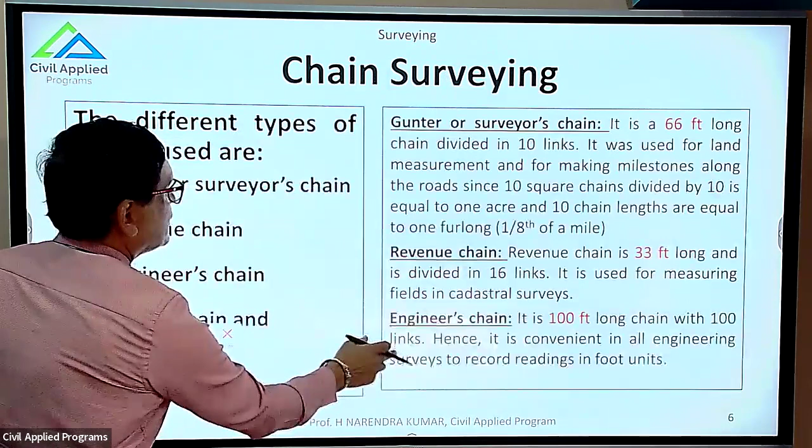I think I left my discussion on the different types of chains used in chain surveying. Let me go to that slide. This is where I left my class. Once again, for continuity, let me go through this slide. So this is the different types of chains essential in chain surveying: Gunter's or surveyor's chain, revenue chain, engineer's chain, metric chain, and steel band.

As I said earlier, the steel band is one of the ultimate linear measuring instruments used for precise measurement. You know that baseline is one of the most important lines in chain surveying, so we can make use of the steel band, also called band chain, for precise measurement. It is also available in lengths of 20 meter and 30 meter. So this is where I left in the previous class.

This is the process employed in chain surveying. What exactly do we do in chain surveying? Before getting into chain surveying, first we need to understand the terminology, that is ranging. What is ranging, my dear students? Ranging is nothing but the process of locating intermediate points on a survey line.

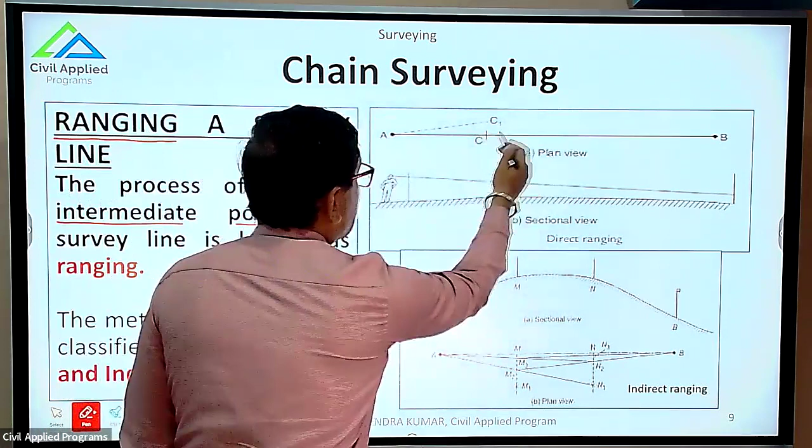You know the chain is made up of 20 or 30 meter. Whenever the line is more than the chain length, we need to mark intermediate station points in order to measure the line in a straight line. So that process of locating intermediate points on the survey line - why do we need intermediate points? Because in order to measure the length AB, we need to mark C, D, etc. on the chain line. So this process is called ranging a survey line.

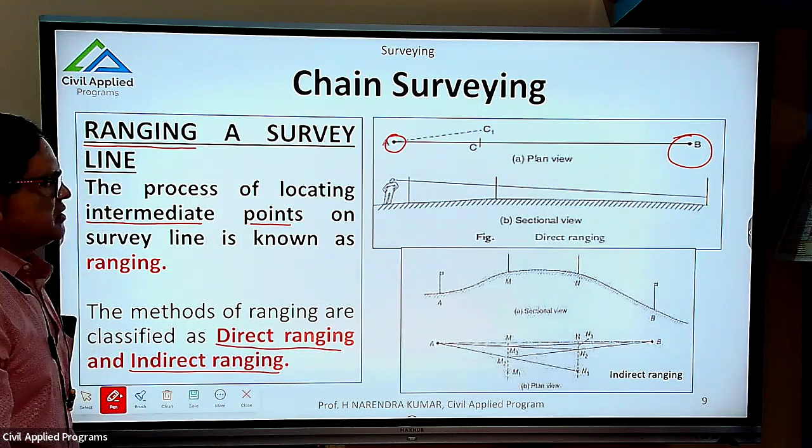So the methods of ranging are classified as direct ranging and indirect ranging. Once again, direct ranging and indirect ranging. The name itself gives you an idea. Direct ranging is when the extreme points A and B are visible, intervisible. So when there is intervisibility, we can go for direct ranging. For direct ranging, we don't require any instrument, we can make use of our eye, called eye ranging.

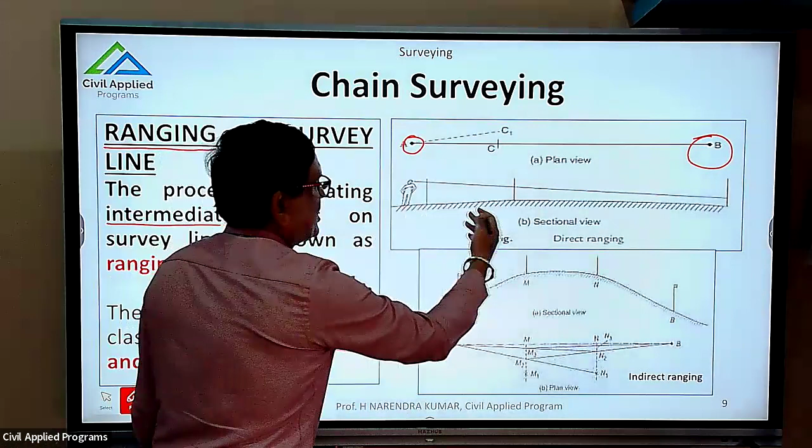By keeping ranging rods at A and B stations, we can place another ranging rod at a suitable distance less than the chain length, so that we get a straight line. So all three ranging rods are coinciding. This is called direct ranging.

Then what is indirect ranging? For example, there is A point here, there is B point. There is a small mound, not a hillock - please remember, it is not a hillock like Nandi Hills, it's only a mound - so that you can cross over from A to B, but there is no intervisibility. If you stand at A point, B is not visible. When you stand at B point, obviously A is not visible. So what we are going to do is indirect ranging.

What is indirect ranging? Randomly we select the stations M1 and N1. The person standing at A will call M1 to a point M2 such that A, M2, N1 is in a straight line. So first we need to select random points away from the chain line, because we don't know those 2 points are on the chain line, since there is no intervisibility. So I'm going to select random points M1 and N1.

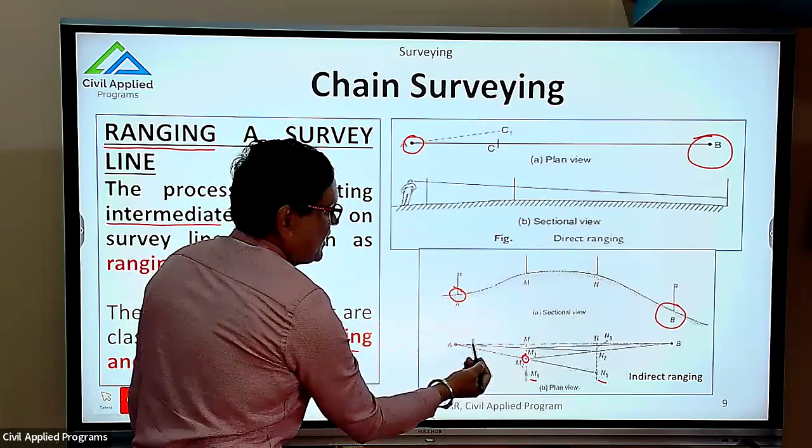Then a person standing at A will call the M1 person to move towards the chain line such that he occupies a station point M2, so that A, M2, N1 is in a straight line. Then the B person will take over. He will call the N1 person to move towards the chain line, occupy a position N2, such that B, N2, M2 is a straight line. This process is repeated several times. Finally, they arrive at stations M and N such that AMN is a straight line.

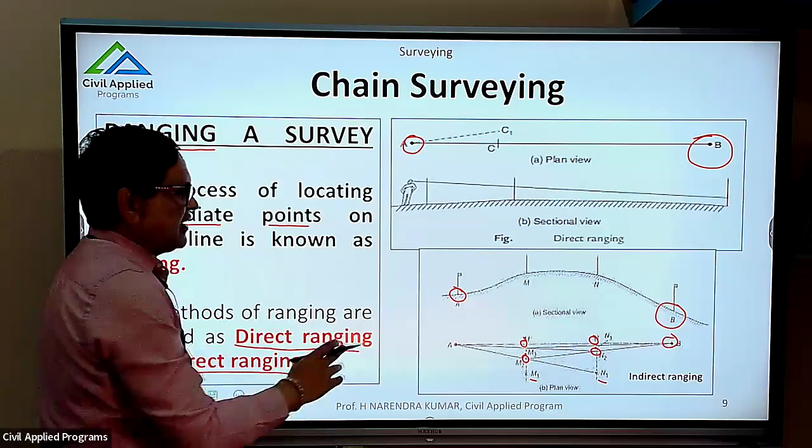Similarly, BNM is a straight line. So at that particular stage, we can say M and N are there on chain line AB. This is a very, very slow process.

Since A and B are not intervisible, we need to go for indirect ranging. This is also called reciprocal ranging. Why is it called reciprocal ranging?

Because the people standing at M and N reciprocate to the instructions given by the people standing at A and B. They reciprocate simultaneously to move towards stations M and N. So this is a very slow process, but a wonderful one in order to mark the intermediate points on the chain line when the stations are not intervisible.

When they are intervisible, the process is very simple. We'll go for direct ranging.

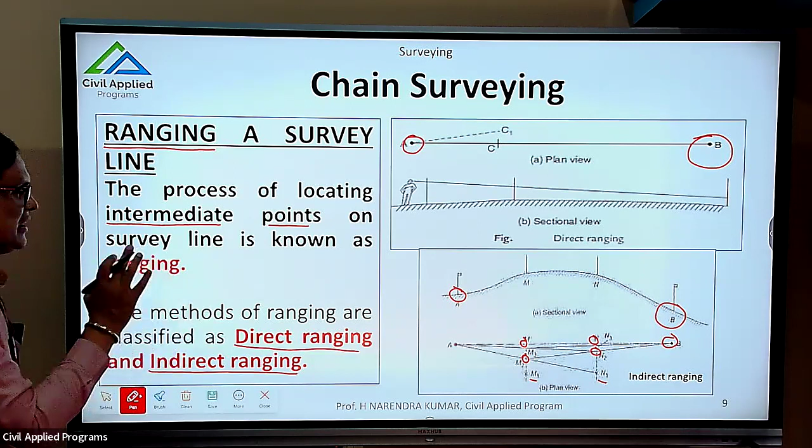So when is chain survey suitable? Let me detail it point wise. Whenever the area to be surveyed is comparatively small, you need to remember this. For example, if somebody asks me to do chain surveying for the entire Bangalore city, it's not possible. Well, it's possible, but it will take years together. So whenever the area is very small, we can go for chain surveying.

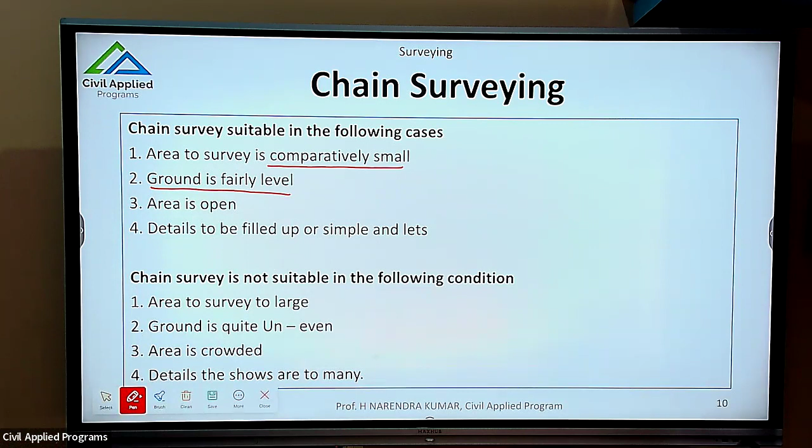The second point is that the ground is fairly level. Then chain surveying is easy. Otherwise, as we discussed about ranging, we need to go for reciprocal or indirect ranging, which is a cumbersome, complicated, time-consuming process. So if the ground is fairly level, there's no problem with intervisibility, and I can go for chain surveying.

The area should also be open. This is also important. If the area is bushy, having a lot of trees, it is going to hamper our surveying. Then, details to be filled up should be simple and easy. If the details I need to capture, like buildings or other natural resources, are simple and fewer in number, then I can go for chain surveying.

What about not suitable conditions? If the area to be surveyed is large, as I said earlier, it becomes a very complex process. If the ground is quite uneven, then whatever I said for suitable conditions, the reverse applies, making it not suitable.

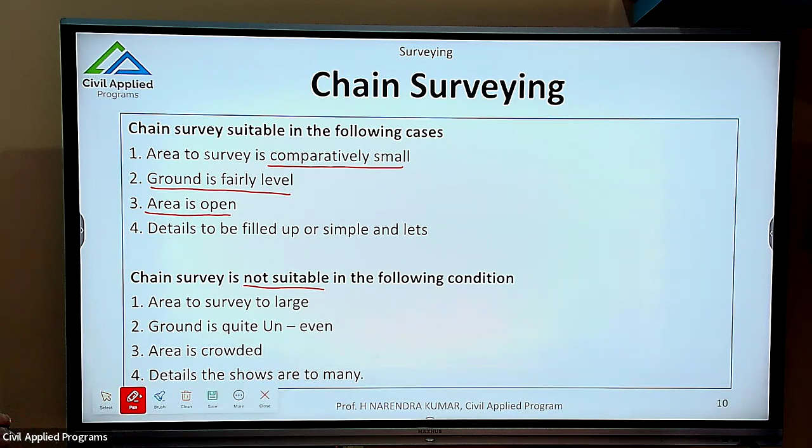If the area is crowded, with a lot of features, it's difficult for me to gather the information, so it becomes very difficult to go for chain surveying. Also, if too many details are available, that is very difficult for me to capture.

Let us understand the various terminologies that are essential in chain surveying. I already mentioned things like station. So what exactly is the meaning of all these terminologies used in chain surveying? This is essential in order to understand chain surveying. For that, I've taken up this particular diagram, which gives complete information about chain surveying.

First terminology: Station. What is a station in chain surveying? A station is a point of importance at the beginning and at the end of a survey. So that means the minimum number of stations required is 2, one at the beginning of the survey and the other at the end.

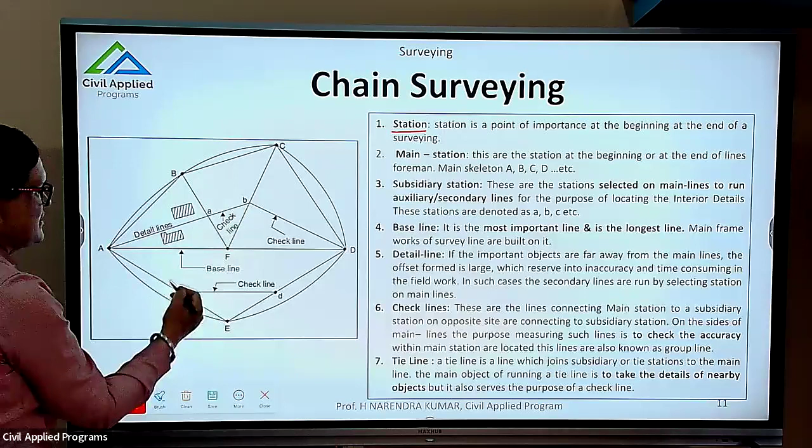If you look at this diagram, you can see a lot of stations: A, B, C, D, E, and also small a, b, c, d, and similarly F. So all these are stations, and among them there are different types.

The first one is the main station. What is a main station? These are the stations at the beginning or at the end of lines. So the main skeletal stations A, B, C, D, E, F are nothing but main stations.

Then what are subsidiary, or secondary, or auxiliary stations? Different names are used for these. Subsidiary stations are stations selected on the main lines to run auxiliary or secondary lines, for the purpose of locating interior details. For example, look at the diagram: there is a building here, so I need to get the details of this building. To do that, I'm going to run secondary lines.

You can see a lot of secondary lines here. All these secondary lines are marked with subsidiary stations, shown here as A, B, C, D. These are all called subsidiary stations.

Next, one of the most important terminologies: baseline. The most important and longest line in the network of our survey is called the baseline. You can see here, AD is the baseline, the longest line. This baseline will be selected on a flat, plane surface preferably.

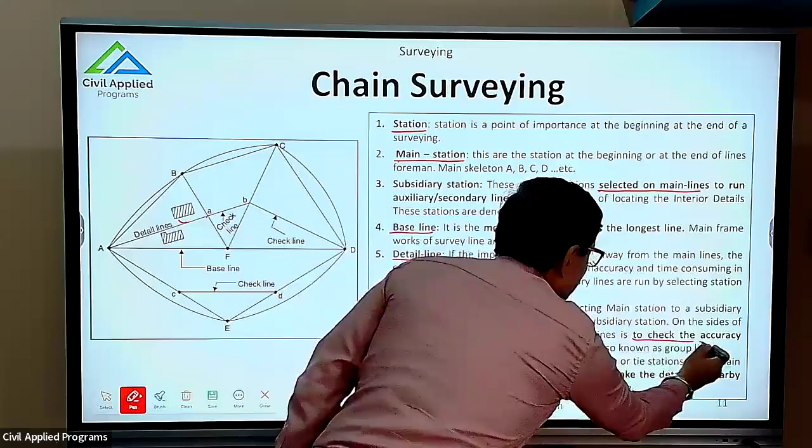Next important terminology is check lines. What is the main purpose of check lines? To check the accuracy within the main stations.

These are lines connecting a main station to a subsidiary station. Subsidiary stations are connected using check lines, and the purpose of measuring such lines located on the sides of main lines is to check the accuracy within the main stations. These lines are also known as group lines, since they are grouped together to check the accuracy of the survey work.

As civil engineers, whatever we do, even marking the plan of a simple residential building, we need to check our marking using check lines. These check lines, on the ground as well as on the plan, should have the same length. So check lines give us complete information about the accuracy of our framework.

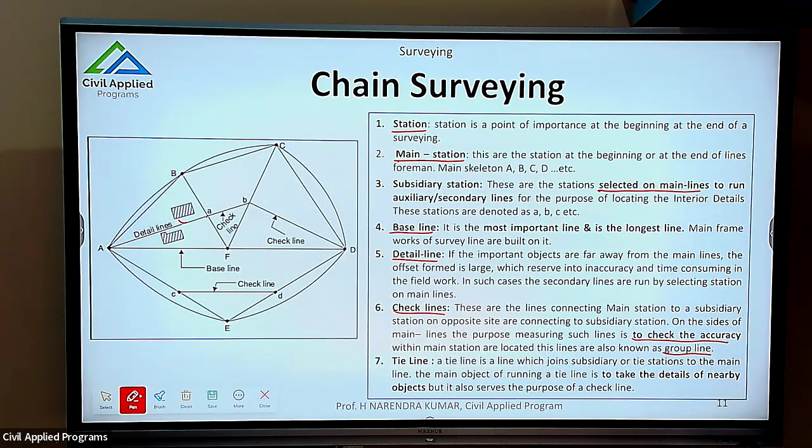Next one is the tie line. The name itself gives an idea—tying together different subsidiary stations. The tie line is a line which joins subsidiary and tie stations to the main line. The main object of running a tie line is to take the details of nearby objects.

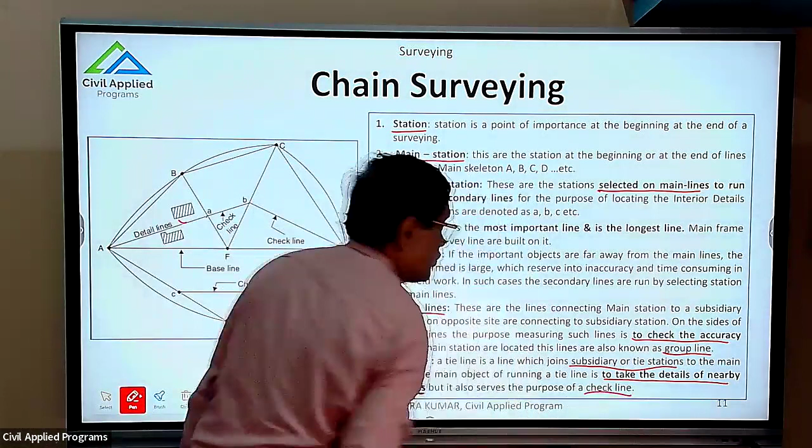Sometimes the tie line also serves the purpose of a check line, and the vice versa is also true—a check line can be used as a tie line, and a tie line can be used as a check line. These are all the important terminologies in our chain survey.

Okay, so what are the points to be considered in selection of station? Okay, this you need to remember. What are the points to be considered in the selection of a station? So there are several points. Let me go through one by one.

First and foremost requirement while selecting a station is the station selected should be visible from at least two more stations. Okay, so see, you need to actually connect this particular sentence with the principle of surveying.

What is the second principle of surveying, my dear students? The second principle is nothing but, in order to mark a new station, there must be two measurements. Minimum two measurements should be considered in order to mark a new station. This is our second principle. So, if a station is visible from at least two more stations, then only the second principle holds good. Otherwise, second principle will not hold good.

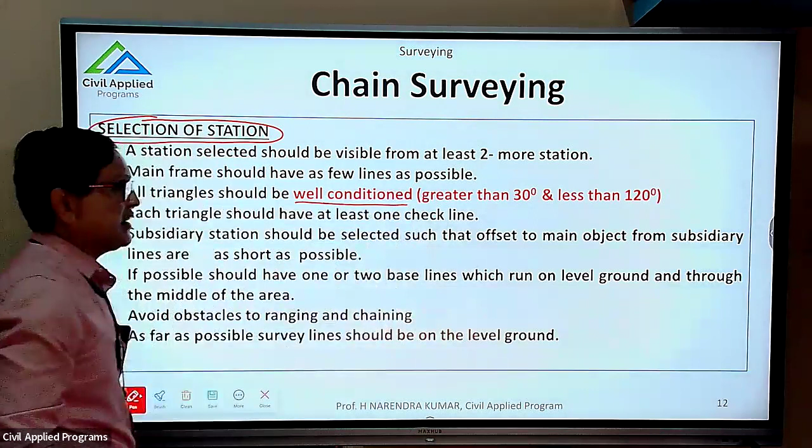The third point is very, very important, that is why it is written in red color. Please do remember, all triangles should be well conditioned. What is a well conditioned triangle? This you are going to study in mathematics. This is a typical triangle used in our survey work.

Well conditioned triangle is that triangle in which the angles are greater than 30, less than 120 degrees. I checked the last 8 years' question papers, and this appeared in almost all of them. You got it? The importance of this particular terminology, well conditioned triangle, under the selection of station, is a point to be considered.

That is, all the triangles that are created in a framework of surveying - forget about chain surveying - in any type of surveying, the triangles must be well conditioned triangles, greater than 30 degrees and less than 120 degrees. If you are interested, why actually 30 degrees and 120 degrees?

If you look at the sine series and cosine series, sine 0 is 0, sine 30 is 0.5. From sine 30 to sine 90, the next 0.5 is rising. So if you commit a mistake in the first 30 degrees in angular measurement, then in the calculation of linear values, it actually multiplies. That is why always the angles must be greater than 30 degrees and obviously less than 120 degrees.

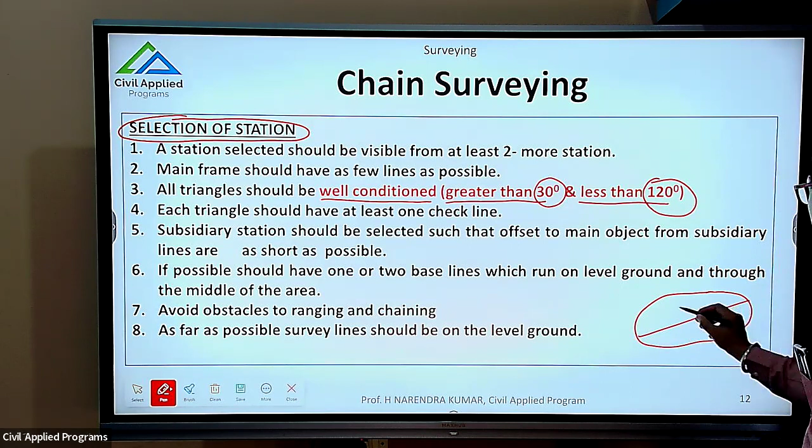Usually they say consider two baselines instead of one single baseline. For example, let me draw a simple sketch here. If this is the area that is considered, the selection says at least you should have two baselines crossing over.

If possible, this is not mandatory, not an essential requirement. The essential requirement is that at least you should have two baselines which run on level ground and through the middle of the area. Both baselines are crossing over in the middle of the area, and they are the longest lines.

Avoid obstacles to ranging and chaining, because if obstacles are there, it creates a lot of problems to cross over. That itself is another topic I would like to discuss in detail. Obstacles may be for ranging, obstacles may be for chaining, or obstacles may be for both ranging and chaining. These are the three classes of obstacles.

For example, there is a mound - we did reciprocal ranging for that, right? That is also one type of obstacle. If it is a hillock, then I cannot go for reciprocal ranging. Then what am I going to do? I'm going to consider what is called the random line method.

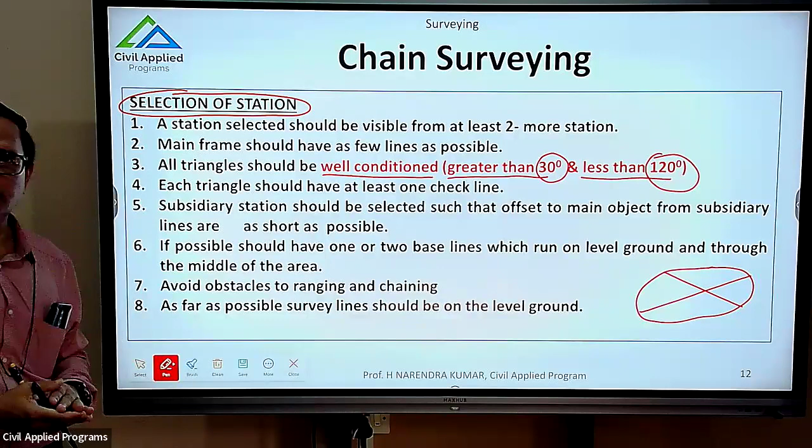This random line method is nothing but taking a random line away from the obstacle in order to cross over. And there may be a pond, a water body, a river, a building - these are all the different classes of obstacle, my dear students.

Next one: as far as possible, survey line should be on level ground. Why should it be on level ground? Because if there is a mound, then we need to go for reciprocal ranging, since there will be an intervisibility problem.

Then we discussed about offset in the previous slide. So how to erect offsets in the field? There are different methods of erecting the offset. This makes use of simple geometrical construction that we discussed in high school - dropping a perpendicular, erecting a perpendicular. These are all terminologies we already learned in high school, and the same geometrical construction is used in our survey work.

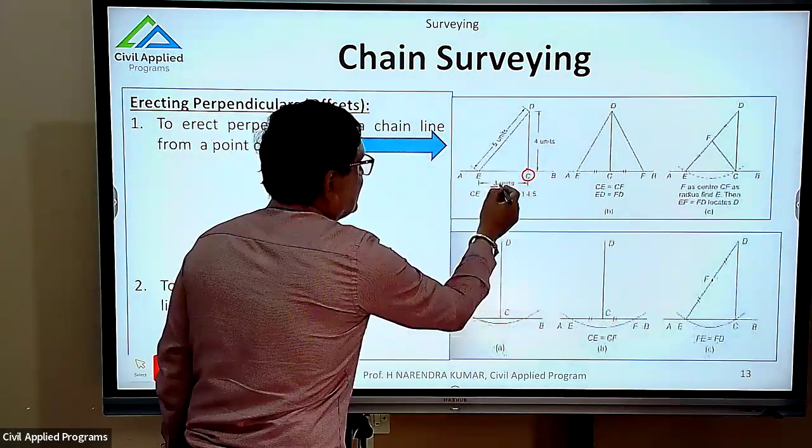Everybody knows this is a right angle because 3 square plus 4 square is equal to 5 square, right? We learned this even in high school. Using this, we can easily erect a perpendicular using the 3, 4, 5 method.

Simple way. Next one is we can erect a perpendicular from C by taking equal distances: CE is equal to CF - you take CE distance and CF distance as equal. Then ED is equal to FD. So this is another way of erecting a perpendicular. Please remember we are erecting a perpendicular.

Next one is another complex process. C is the point. You take one random point F, and with FC as radius, draw an arc. Please look at the diagram - this arc cuts the chain line at point E. Join EF, continue it till you reach D such that EF is equal to FD. From D, join DC. This is erecting a perpendicular - this is another way.

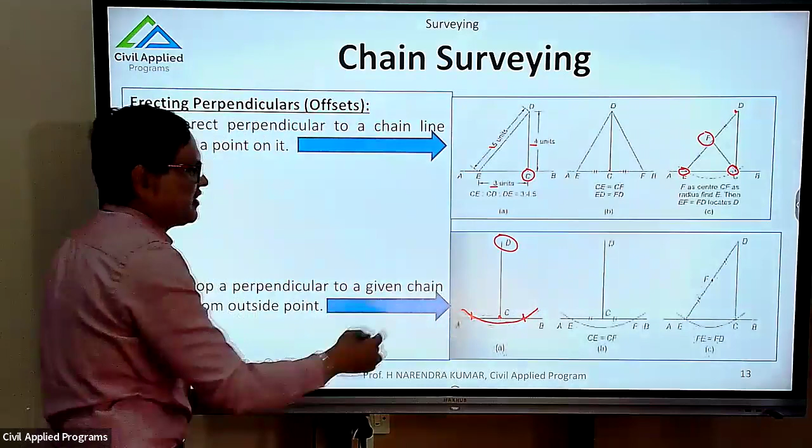Join DC. Here we are erecting the perpendicular, and here we are dropping the perpendicular. That is the technical difference between erecting a perpendicular and dropping a perpendicular.

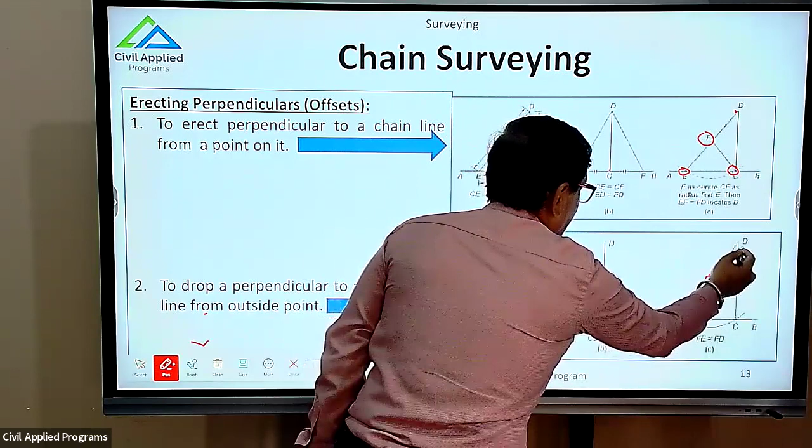Similarly, here once again draw an arc and bisect it, such that CE is equal to CF. This method is very much similar to the previous method. You need to consider a point outside the chain line, then draw an arc. This arc cuts at E and C, such that EF is equal to FD. Then you can easily drop a perpendicular. So these two methods are much similar.

All these methodologies use what is called simple geometrical construction. If you are good at geometry, you can create your own methodologies for erecting a perpendicular. Erecting a perpendicular involves erecting the perpendicular to a chain line from a point on it, or dropping a perpendicular to a given chain from an outside point. Both are possible in our chain surveying.

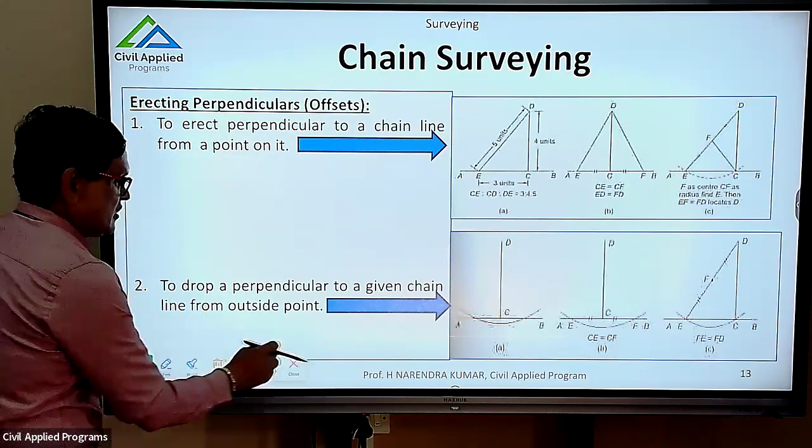Then there is the instrument which is essentially used in our chain surveying. The previous method is nothing but geometrical construction. If these instruments are not available, unfortunately we forgot to carry this instrument to the field, so what to do? Then we go for dropping a perpendicular or erecting a perpendicular. But if instruments are available with us, like the optical square...

Please do remember this, because I checked in one of the question papers: what is the principle behind the optical square? The principle behind the optical square is double reflection. So in order to explain that, I've taken this particular slide.

The optical square is a small hand instrument. You can use your hand to make use of the optical square. Hold the optical square in your hand, that's all, very easy to make use of. So in order to lay off an angle, to erect right angles, we are going to make use of the optical square. The basic principle is nothing but double reflection. I will come back to this explanation.

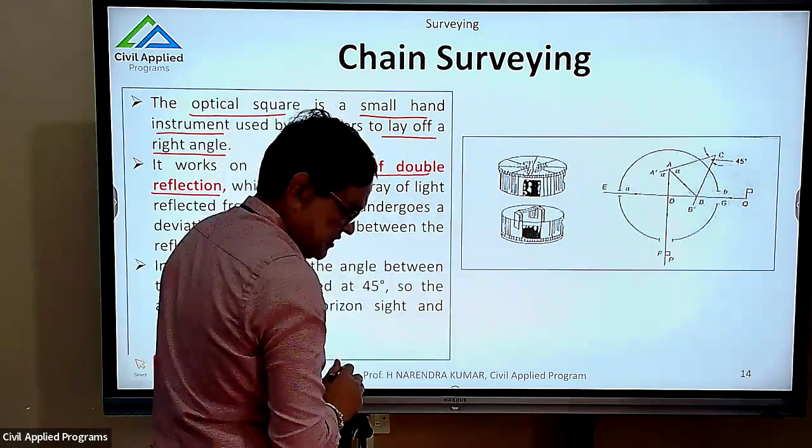Let me explain this diagram first. See here, this is one station, this is another station. I need to erect or lay off a perpendicular. This is where I am standing, my eyes are there. There are two mirrors here, one mirror here, another mirror here. These two mirrors are provided in such a way that the angle made by these two mirrors is equal to 45 degrees.

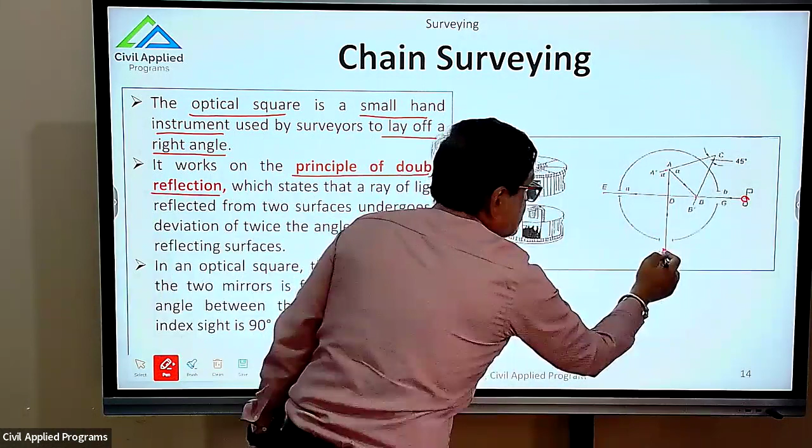The rays will pass through this mirror because it is half grounded, half clear. Please understand, this is half grounded, half clear, so that in half of the portion the rays pass through it. You can see the ray. Whereas the light ray which comes from this particular point hits the mirror and is reflected back, or deflected back, to this mirror, and once again it passes over.

So these two ranging rods kept at these two points, if they overlap one above the other like this, then you can say the points are at right angles to each other. So you need to use the optical square handheld instrument. If you can remember your undergraduate level second year chain surveying, we make use of the optical square by holding it in front of your eyes, exactly in between, so that these two ranging rods will overlap, one being the reflected image, the other being the direct image. If they overlap, then you can say that you are standing on a point which creates a right angle. It's a wonderful instrument.

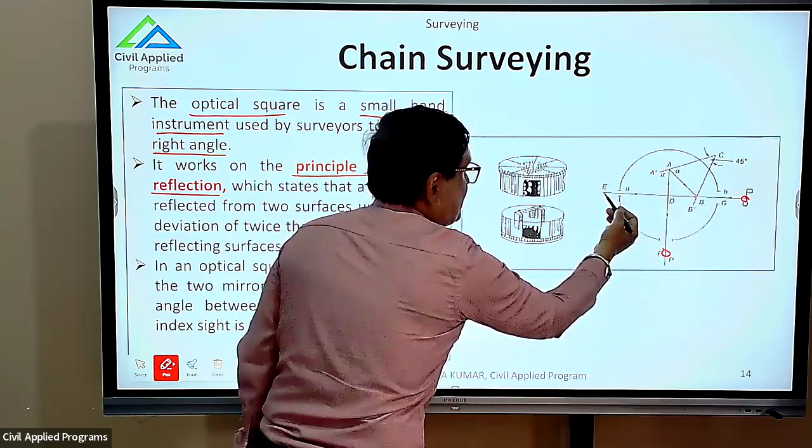What is more important for us is the principle behind it, double reflection. The rays which come here will be reflected from this mirror to this mirror, and once again from this mirror it will be reflected back to the surveyor. That is why it is called the double reflection method.

The principle is double reflection. In an optical square, the angle made between the two mirrors is fixed at 45 degrees. If the angle is exactly 45 degrees, then the angle between the horizon sight and the index sight is equal to 90 degrees. So you need to make that 45-degree angle between the two mirrors. That is nothing but the calibration for the optical square.

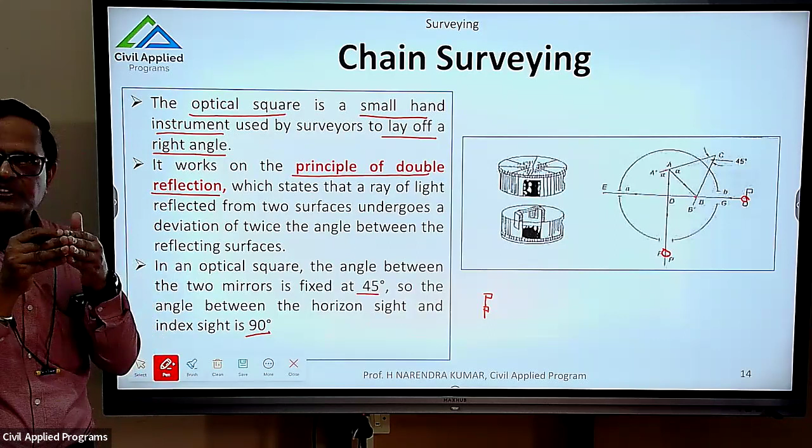There is a screw in order to move that mirror. Those two mirrors can be operated using a screw. In the calibration, experts make use of those screws in order to create 90 degrees. So that means those two mirrors are at an angle of 45 degrees to each other in order to create what is called double reflection.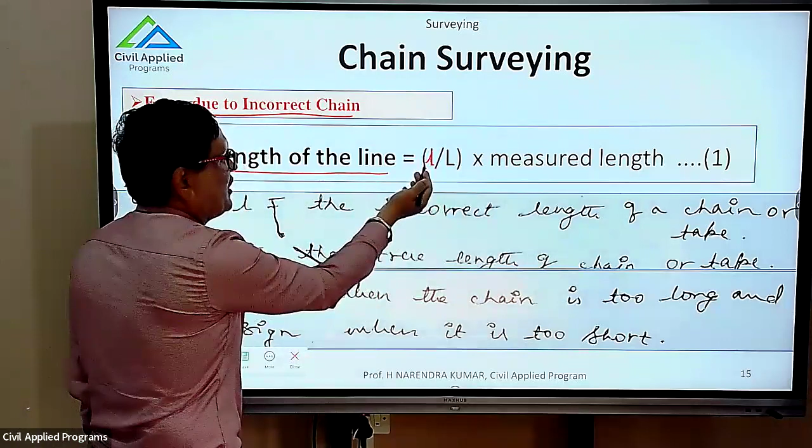So when we are using an incorrect chain, there is an error, and we need to calculate the true length of the line using this formula. Once again, simple formula, l by L, take the ratio between l by L multiplied by measured length. So there are two terminologies here, small l and capital L.

What is that small l? Small l is the incorrect length of the chain. So 30 meter is the chain length. If it is 30.1, that is incorrect length, incorrect length of the chain. Second, capital L, the true length of the chain. The true length is nothing but 30 meters. Incorrect length divided by true length.

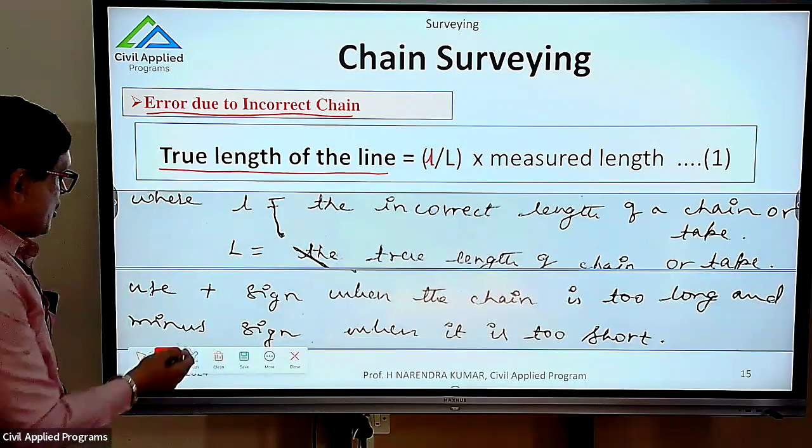Please do remember, there are certain sign conventions. Plus sign when the chain is too long. If instead of 30 meters it is 30.1 meter, you need to use plus sign, you need to add, because you are measuring the length thinking it is 30 meters, but you are measuring 30.1, you are over measuring it, so you need to add. Minus sign when it is too short. If instead of 30 meters it is 29.9 or 29.85 meters, then you need to use minus sign. That you learn in the problem.

I believe that you are copying this equation. Error in area due to incorrect chain. So you are making use of this chain for the measurement of area. Then how to correct the area? True area is given by small l by capital L whole square multiplied by measured area. If it is length, l by L. If it is area, l by L whole square multiplied by measured area.

Similarly, for volume measurement, error in volume due to incorrect chain, it is l by L whole cube multiplied by measured volume. The formula remains the same: l by L for length, l by L whole square for area, l by L whole cube for true volume. Usually this will not come into picture in our surveying, we are not going to measure the volume. In surveying, basically we measure length, we measure area. Volume measurement is rarely done.

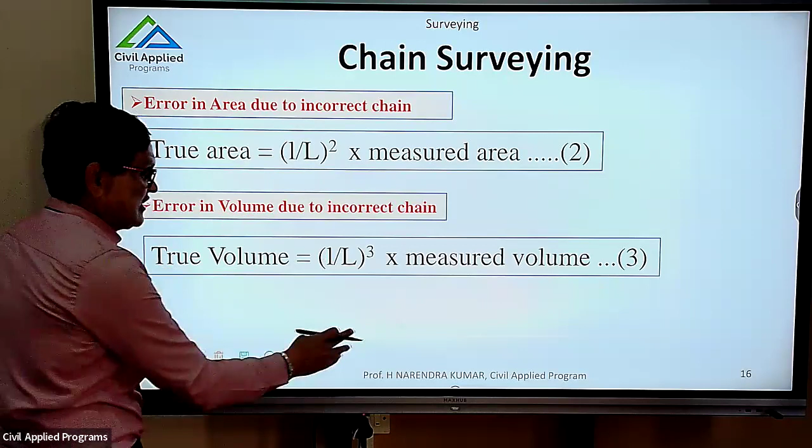These are all simple problems. Once again I repeat, please use your books and pen. Keep a notebook and a pen, and always make a note of it.

First problem: the length of a line measured with a 30 meter chain was found to be 634.4 meters. It was afterwards found that the chain was 0.1 meter too long. Find the true length of the line.

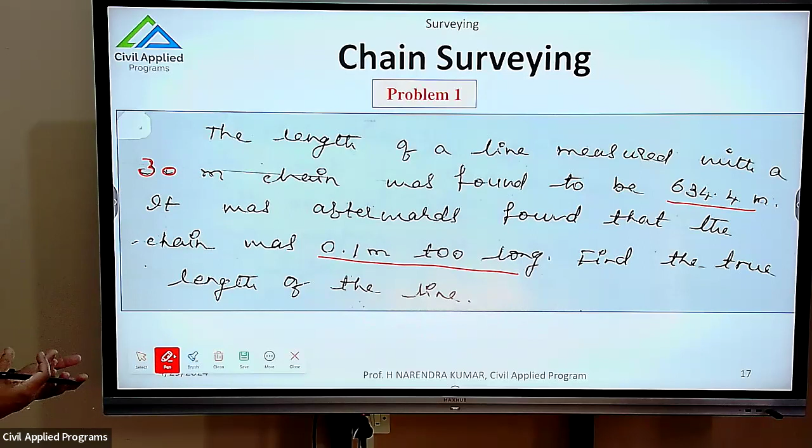So they measured 634.4 meters using a chain of 30-meter length. But after completion of the survey work, the surveyor got to know that the chain which was used was 0.1 meter too long. This is known after measurement, and we need to calculate the true length.

We cannot leave it as it is, because 0.1 meter is not a small error. We need to correct it using the equations we learned earlier in the previous slide. So here we need to make certain assumptions.

What is the basic assumption made usually in these types of problems? The basic assumption made in this type of problem, my dear students, is that we assume the chain was correct at the beginning of the surveying. That is, at the beginning of the surveying, the chain is exactly 30 meters.

So upon completion of the measurement, the chain was 0.1 meter too long, because during the measurement we pull the chain. You know a 30-meter chain has 150 links, each link made up of 20 centimeters, or 0.2 meters. So when you pull it, since it's made up of a lot of rings, it expands. So there is an error of 0.1 meter.

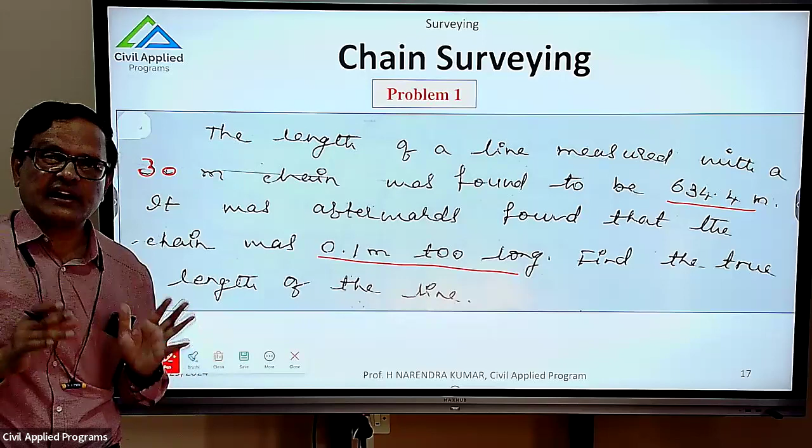But our assumption says at the beginning of the survey, the chain was correct. Only if you assume like that can we solve this problem. Otherwise it's not possible. You cannot say it was correct in the beginning, and even after measuring 50% of the length it was still good—it's not possible. We need to assume the chain was correct at the beginning and became too long

at the end of surveying, measuring 634.4 meters at the end. So if you assume this, we can solve this problem.

Look at the solution, my dear students. I did it in 3 levels. First is the true length of the line, so we need to write this equation: we already learned small l by capital L, multiplied by the measured length of the line.

What is small l? It is the incorrect length of the chain. It is 30.1, as given in our problem. This is the type of problem you will come across in the examination.

You know this is MCQ type—only a 2-mark problem will be given in the examination. So these are all the types of problems you can expect in the examination.

So 30.1 is the incorrect length of the chain. The true length of the chain is 30 meters. The measured length of the line, given in the problem, is 634.4 meters.

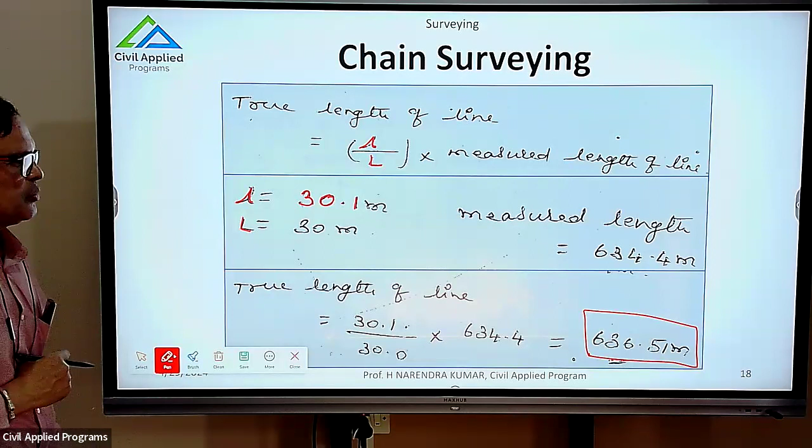So it's a simple problem: small l by capital L, where small l is the incorrect length of the chain and capital L is the true length of the chain, and measured length is given as 634.4 meters. Substituting all these values in the equation, I get 636.51 meters. This is one problem.

Next is a combination problem. Let me first go through the problem: a 20-meter chain—here, instead of 30 meters, we are using 20 meters.

A 20-meter chain was found to be 0.05 meter too long after chaining 1400 meters. Okay, please do remember these values: 0.05 meter too long after chaining 1400 meters. So what is the basic assumption made?

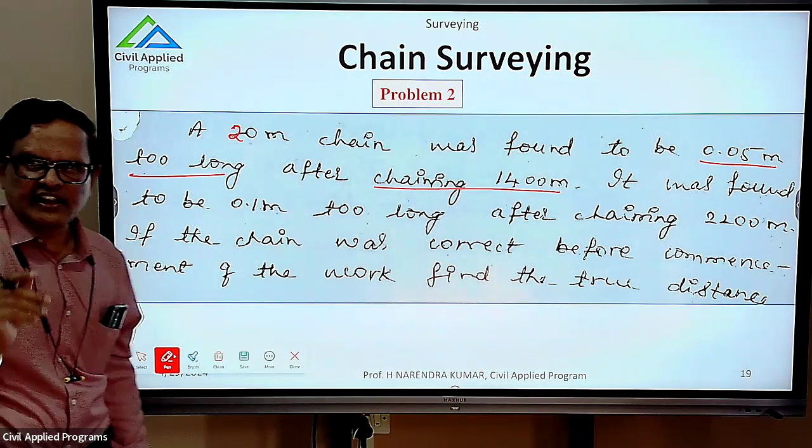I repeat, the chain was correct at the beginning of the survey. It was found to be 0.1 meter too long after chaining 2200 meters.

If the chain was correct before the commencement of the work, an important information, my dear students, the chain was correct before the commencement of the survey work. Find the true distance. So I'm going to draw a diagram to make it as simple as possible for you.

So what is the total distance measured? It is 2200 meters. Let me draw a line. This is 0 meter, and this is 2200 meters.

In the first phase, the 20-meter chain was found to be 0.05 meter too long after chaining 1400 meters. So let me mark 1400 meters on the line. So after measuring 1400 meters, they got to know there was some problem with the chain being used.

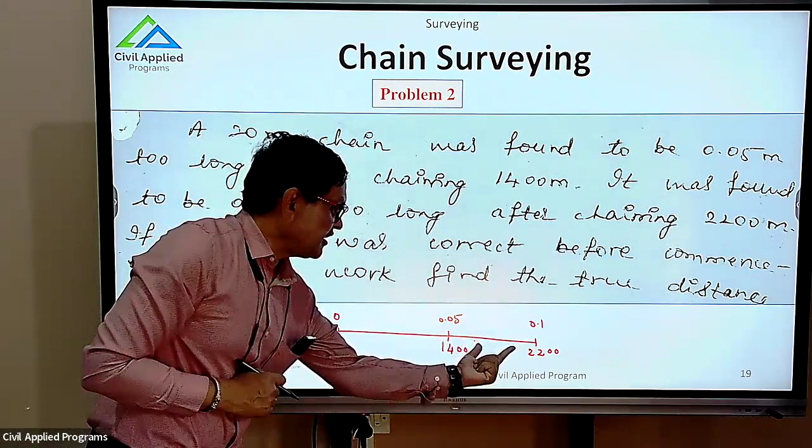Similarly, for the length 800 meters. See, 1400 to 2200, so this is 800 meters, and this is 1400 meters. So I'm dividing this into two parts: one is 1400 meter length, the other is 800 meters. For the 800 meters, the mean elongation is the average between 0.05 and 0.1.

So that calculation is the preliminary calculation before applying the formula. I need to calculate the mean elongation. Whereas in the previous problem, they never mentioned this sentence, that the chain was correct before the commencement. If there is a sentence like that, then we need to calculate mean elongation even in the previous problem.

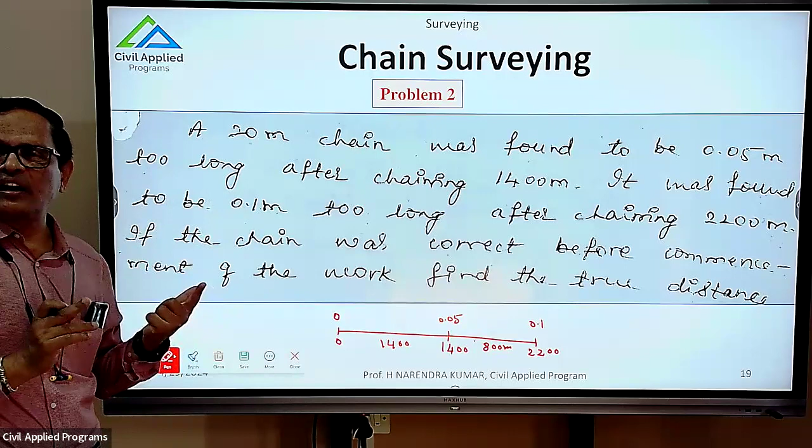Since it was not there, we don't require the mean elongation calculation in the previous problem. But here it clearly says the chain was correct before the commencement of the survey work, so that means I need to calculate the mean elongation. Now let me show the calculation part.

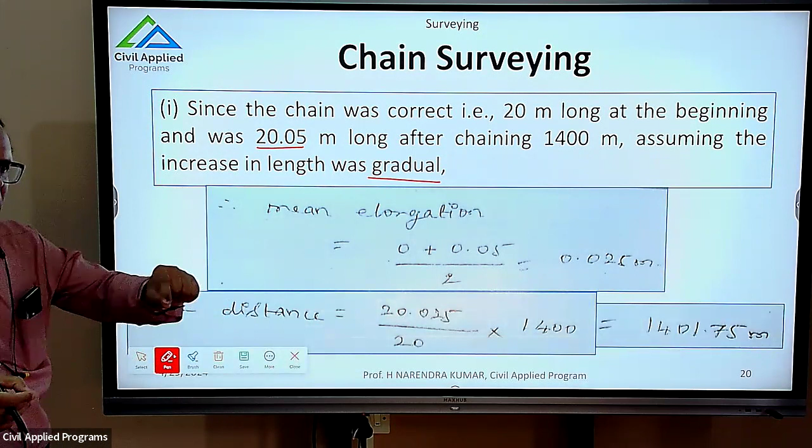So that explanation, whatever I did, is written here. Since the chain was correct, that is 20 meter long at the beginning, and was 20.05 meter long after chaining 1400 meters - please do remember that diagram - assuming the increase in length was gradual, so it increased from 20 to 20.05 gradually.

So there is a gradual elongation during the measurement of 1400 meters. So I calculated mean elongation by taking the average of 0 and 0.05, divided by 2, and got the mean elongation 0.025. So the incorrect length of the chain becomes 20.025, because I'm adding this 0.025 to the 20 meter length. So it becomes 20.025 divided by 20, multiplied by 1400 meters. If you have a calculator, you can do it.

The result is 1401.75 meters. This is for the first measurement, for 1400 meters. The true distance is 1401.75 for the first part. What about the second part?

Okay, for the second part, the remaining distance. What is the remaining distance? I already wrote it in the diagram. That is 800 meters, that is 2200 minus 1400, for 800 meters.

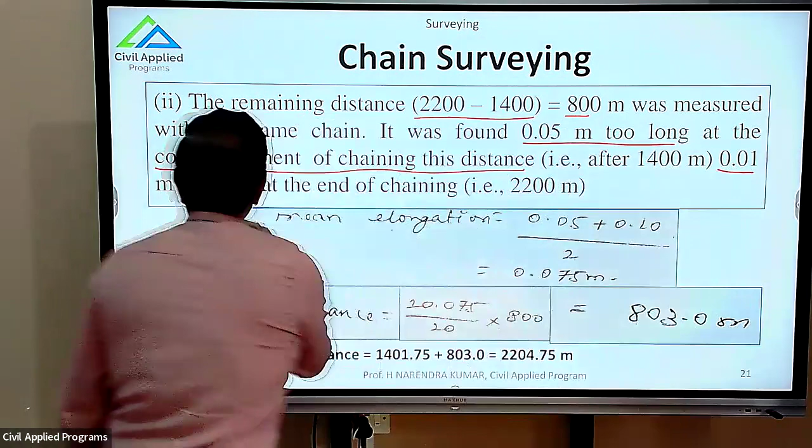Using the same chain, it was found 0.05 meter too long at the beginning of the chaining of this distance. That is, at 1400 meters, the chain was 0.05 meter long, and 0.1 meter too long at the end of chaining at 2200. So at the beginning of 1400 meters, it was 0.05. At the end of 2200, it was 0.1.

What is the mean elongation then? Mean elongation is nothing but 0.05 plus 0.10 divided by 2. Then it becomes 0.075. This is the mean elongation for the 800 meters distance measurement.

So I'm going to make use of the same equation, that is true distance is 20.075. I need to add 0.075 to 20 meter, so incorrect length of the chain, right? 20.075 divided by true length of the chain, 20 meter, multiplied by the distance measured, which is 800 meters. So I'll get 803.0 meters.

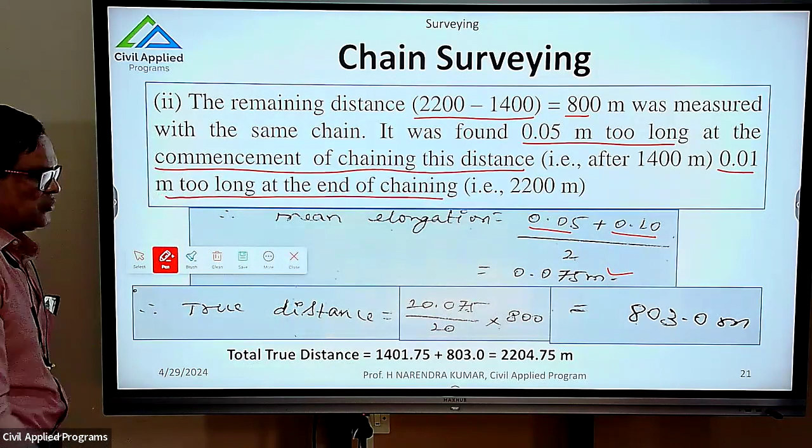So one is 1401.75, another one is 803. I need to combine these two. So if I add these two, total true distance is 1401.75 plus 803, so it is 2204.75.

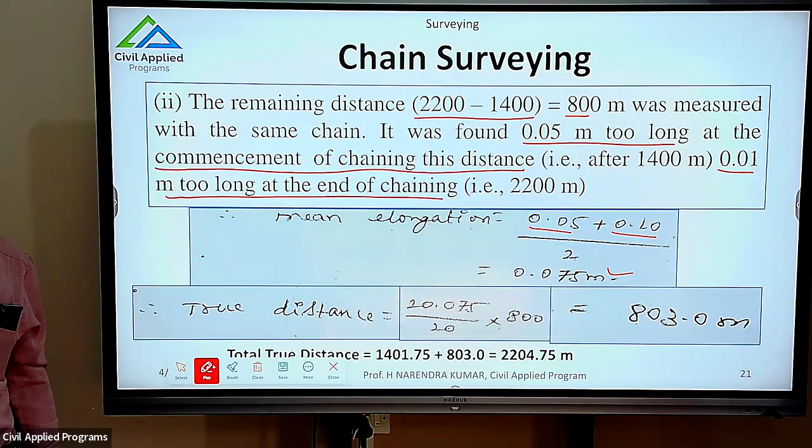So if I am not using this correction, then the error will be 4.75 meter. That is why in surveying, the important point to be noted down is, always when you find error in the instrument, use your mathematical sense to correct that error.

See, let me tell you, these are not great equations, they are nothing but ratio and proportion. Very simple. For 20 meter, it is 20.075. For 800 meters, what is the correction? Simple ratio and proportion that we learned in our 5th or 6th standard, right? So if you remember that concept of basic mathematics, our problems are so simple.

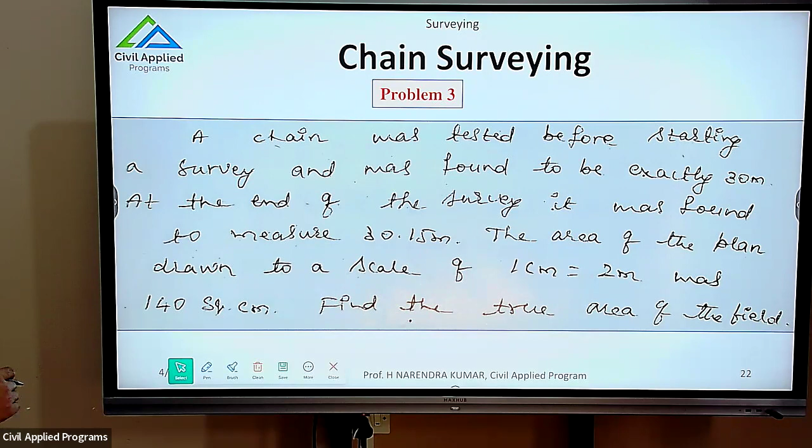Next problem. A chain was tested before starting a survey and was found to be exactly 30 meters. So no problem with the chain at the beginning of the survey.

Exactly, let me underline this please, because I would like to bring to your notice the important point: exactly 30 meter. That means they checked before getting into the work, the length of the chain was exactly 30 meters. At the end of the survey, it was found to measure 30.15. Some error. 30 meter was there in the beginning, but after completion, they got some doubt and checked once again, it was 30.15.

The area of the plan drawn to a scale of 1 centimeter to 2 meters. So 1 centimeter is equal to 2 meters. This is the area of the plan drawn to a scale. After this measurement, they created a plan by taking a suitable scale, 1 centimeter is equal to 2 meter, and that area is equal to 140 square centimeter on the plan. Find the true area of the field.

Okay, they created a plan and got the area 140 square centimeter, and we need to calculate what is the true area of the field by applying that correction as well as by applying this scale factor.

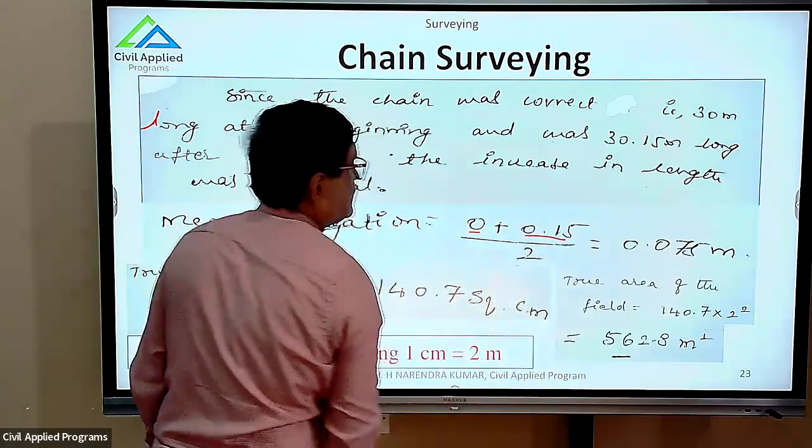So the mean elongation is 0 at the beginning, 0.15 after the completion of the work. Mean elongation, mean is average, divided by 2, so 0.075 is the mean elongation. So if I add 0.075 to the chain length, it becomes 30.075, the incorrect length of the chain, small l by capital L.

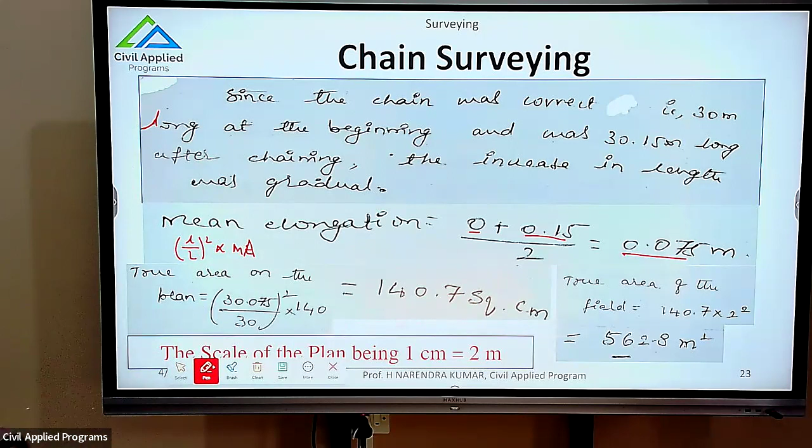What is the formula? Once again, let me write here: l by L whole square, multiply by measured length. Or here it is measured area, right? Because we are calculating area. So l by L whole square multiplied by measured area.

So l by L is 30.075 divided by 30, whole square, multiplied by 140. It is given in the problem itself, 140 square centimeter. So it becomes 140.7 square centimeter. Please use the calculator and tell me the answer or check the answer. Please check the answer after doing it, because if there is any mistake in my calculation, let me rectify.

This is 140.7 square centimeter. This is on plan, the correction is on plan. But what the problem says is we need to calculate the correction on the field. How to calculate? Please look at this.

The sentence which is given in black and red color: the scale of the plan is 1 centimeter equal to 2 meter. That is, 1 centimeter on the plan is equal to 2 meter on the field. If you measure 1 centimeter on the plan, it will be 2 meter in the field.

So the true area of the field is 140.7 multiplied by 2 square, because 1 centimeter is equal to 2 meter. So how can I showcase this? See here, 1 centimeter is equal to 2 meter.

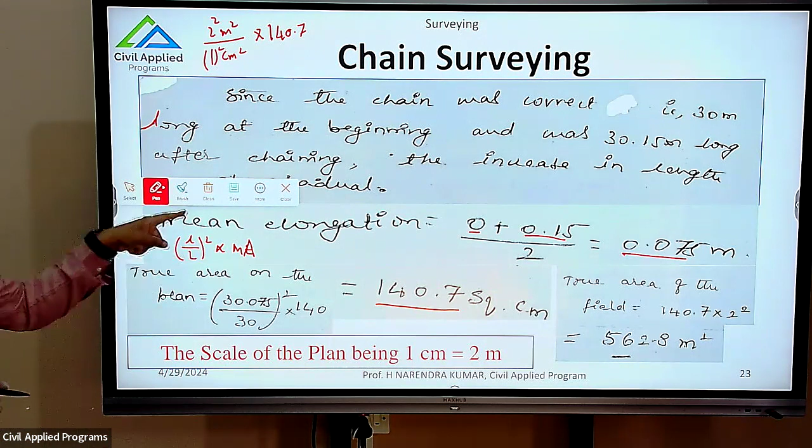So this is nothing but a twofold problem in which the correction is made for the plan. Then we used the corrected area or the true area, whatever it may be, in order to calculate the true area of the field that is being surveyed.

This is one of the UPSC problems, my dear students, for I think 2 marks. I took this long back, it was there in my kitty, long back in my notes. So I took this UPSC problem also, so that if you are able to solve this kind of problem, then the problems that appear in KPSC will be very, very simple for you.

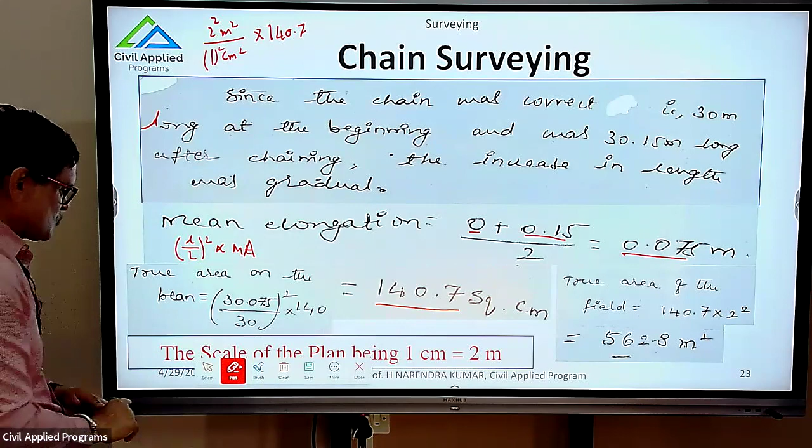I would like to give you 2 minutes to solve this problem. This is a brain teaser problem. Don't think that sir has to solve all the problems. This is not a classroom, he is asking us to solve the problem.

It's not the case. See, I need to understand how far you are following my classes, because I need to evaluate myself, how far you can understand the problem statement. Because whatever problem I am going to solve here, I cannot say a similar kind of problem will appear in the examination. We need to understand the basic concept of the problem before taking it up for solution.

This is a one-line answer, also a UPSC problem for 2 marks. Let me read the problem first: the field was surveyed by a chain and the area was found to be 127.34 hectares. No problem, acres or hectares or meter square, no problem for me, don't worry too much about the units, let it be the same unit. 127.34 hectares, if the chain used in the measurement...

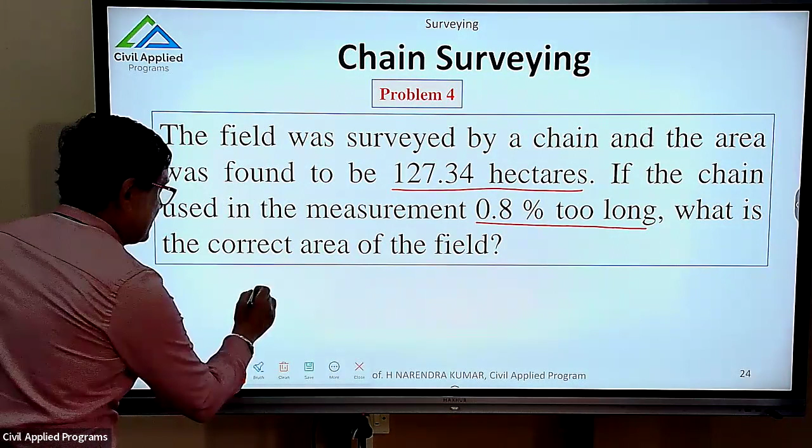For the area, what is the formula? L by L whole square multiplied by measured area. I will write MA for measured area. So I need to create this L by L. And don't tell me the information is incomplete, that they haven't given us the length of the chain, whether it is a 20-meter chain or 30-meter chain and so on.

Nobody will listen to your questions because it clearly gives me the percentage. So what is that percentage? 0.8% too long, so I need to use that 0.8% in this bracket L by L. I am looking at the meeting chat - is anybody trying? Please let me know. If not, I will take up the solution. That's okay, so let me go to the solution.

See, true or correct area of the field equals L by L whole square multiplied by measured area. So in the place of L by L, I am going to substitute 1.008. What is that 1.008? See here, I will write it.

0.8%. How to express this in decimal system? 0.8% is 0.8 divided by 100. So 0.8 by 100 is nothing but 0.008.

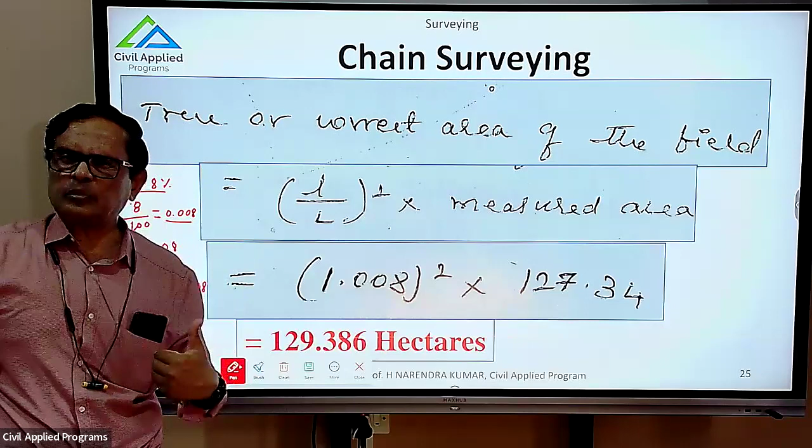So 1.008 whole square, that is L by L ratio, is 1.008, irrespective of the length of the chain. If you are making use of a 20-meter chain or 30-meter chain or whatever it may be, the percentage of error is 0.8%. So if I consider that 0.8% into decimal system, it becomes 1.008. Since I am calculating the true area of the field, 1.008 whole square multiplied by 127.34, you will get the true area, 129.386 hectares.

Just one line answer, 2 marks. This is a problem taken from UPSC.

Please do remember, once again let me repeat: 0.8% means it is 0.008 in the decimal system. For example, if it is 1%, that's 0.01. 0.8% is 0.008. So how to make use of this 0.008? In the decimal system, it is 1.008. L by L ratio becomes 1.008. So instead of 0.8%, if it is 1%, then it becomes 1.01. You got it? How to make use of this?

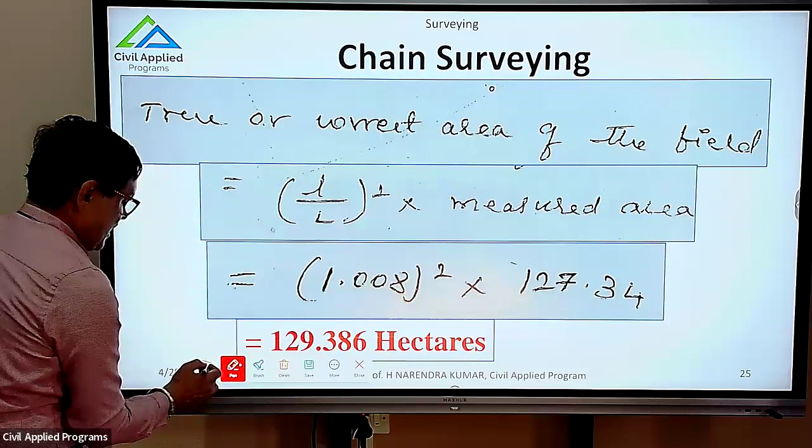Then I'm going to use this value here: 1.008 whole square multiplied by measured area, which is given in the problem. So it becomes 129.386 hectares, my dear students. So this is also one of the beautiful problems that will come across in UPSC and as well as KPSC.

This is the homework problem for the next class, because the learning outcome will be evaluated. What do you mean by learning outcome? Whatever is being discussed in the regular class, is it being followed by the students or not? That is nothing but the learning outcome. So I am giving you two simple problems, very much similar to the problem I already solved in class.

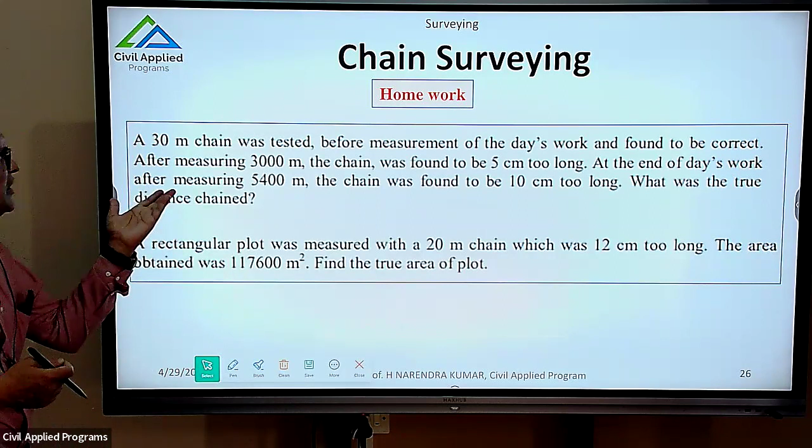A 30-meter chain was tested before measurement of the day's work and found to be correct. So it was correct at the beginning. After measuring 3000 meters, it was found to be 5 centimeters too long. At the end of the day's work, after measuring 5400 meters, the chain was found to be 10 centimeters too long. What was the true distance?

First, we need to draw a line. This is 0 meter, this is 3000 meters, this is 5400. 0, 3000, 5400, right? It was correct at the beginning, 0, then 5 centimeters too long. Make sure it is in centimeters: 5 centimeters too long, 10 centimeters too long.

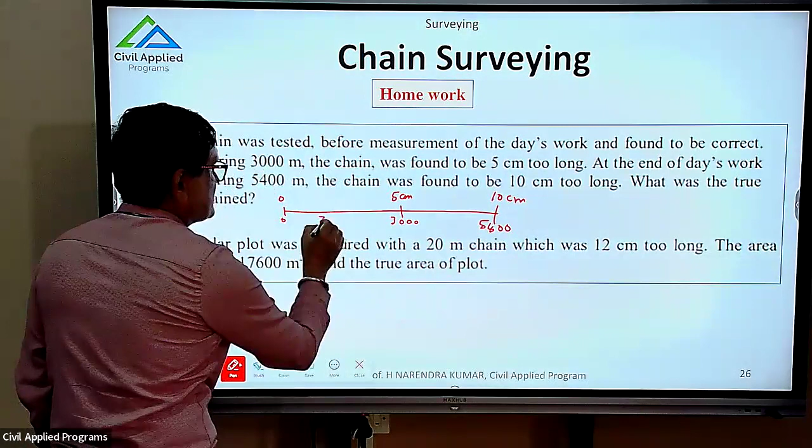So this is the problem. The first distance is 3000 meters, the second distance is 2400 meters. Then you need to apply mean elongation for the first phase of measurement, mean elongation for the second phase of measurement, apply the correction for 3000 meters and the correction for 2400 meters, and add those two distances to get the true distance. I am giving you the input also.

Then there is another problem on area. A rectangular plot was measured with a 20-meter chain which was 12 centimeters too long. The area obtained was 1,17,600 meters square. Find the true area of the plot. This is the direct question: L by L whole square multiplied by the measured area.

Multiplied by the measured area. So you know the formula, let me write it also: L by L whole square multiplied by measured area, MA.

So here, which was 12 centimeters too long, directly you can use 20.12 because there is no mention of beginning of survey - the chain was correct at the end of the survey being 12 centimeters. No, it simply says the chain was 12 centimeters too long. So you need to make use of 20.12 divided by 20 whole square multiplied by 1,17,600, and you'll get the answer.

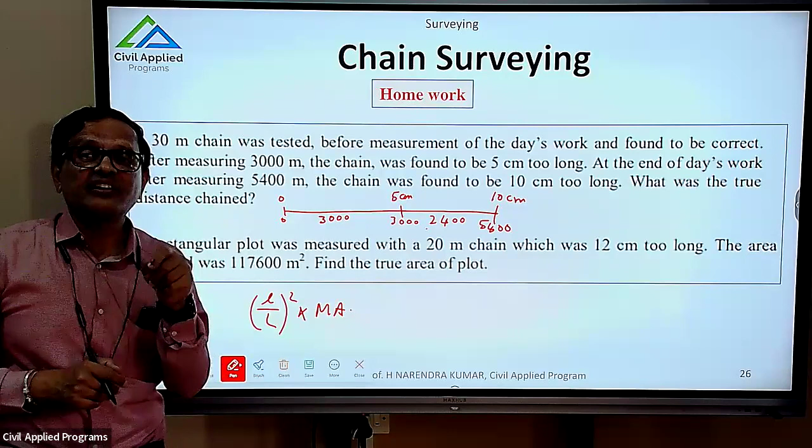This is the type of problem that appears in the examination because usually MCQs are for 2 marks - I checked all the previous question papers, it's for 2 marks. When it's for 2 marks, they cannot ask a complex problem. What they do is split even the complex problem into simple problems. I will show you in the error calculation, tape correction calculations - there are different types of tape corrections. They are not going to ask all 5 types; you need to pick whatever is required. That selection is important. Here also, just the formula, substitution, and you will get the answer.

Even for 2 marks, this problem is lengthy, but I saw this type of problem in one of the question papers. That is why I am not leaving any of these problems.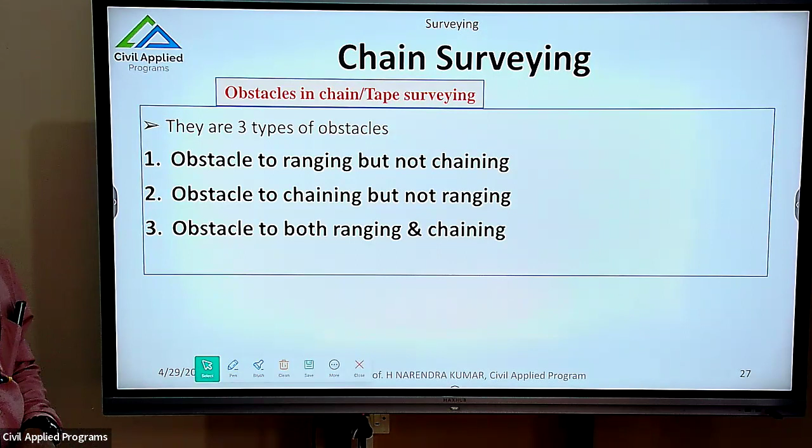Next, the obstacles. As I said earlier, during the selection of the stations, you need to avoid the obstacles. Here you will get the answer why we need to avoid the obstacles, because if there are any obstacles, you need to do a lot of construction in the field in order to overcome the obstacle.

So we can classify the obstacles into different classes. Obstacles to ranging but not chaining: ranging is not possible, chaining is possible. Ranging obstacle is nothing but you cannot fix any intermediate points.

So there are certain classes: obstacles to chaining but not ranging, where chaining is not possible but ranging is possible. I will give you some examples. Obstacles to both ranging and chaining, where ranging is also not possible and chaining is also not possible because obstacles are there.

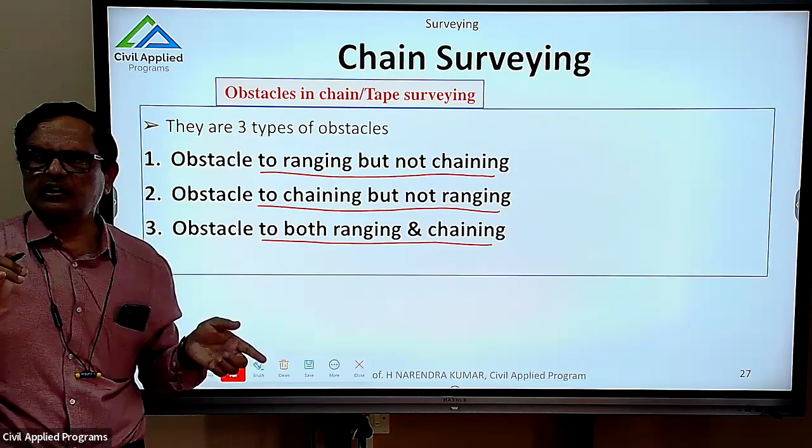Once again I repeat: first is obstacles to ranging but not for chaining, next is obstacles to chaining but not for ranging, and then obstacles to both ranging and chaining. Now we'll take up in detail.

So obstacles in chain and tape surveying. Sometimes we say chain surveying as well as tape surveying. So obstacles to ranging but not chaining - this type of obstacle is where the ends are not intervisible. See here, A station, B station.

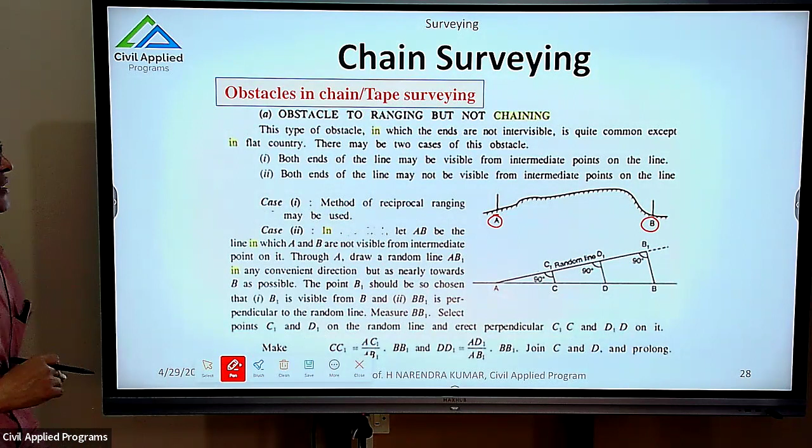Ends are not visible. There is a small mound, and B is somewhere at a depression. So if I stand at A, B is not visible. So there may be two cases of this obstacle: both ends of the line may be visible from intermediate points, or both ends of the line may not be visible from intermediate points.

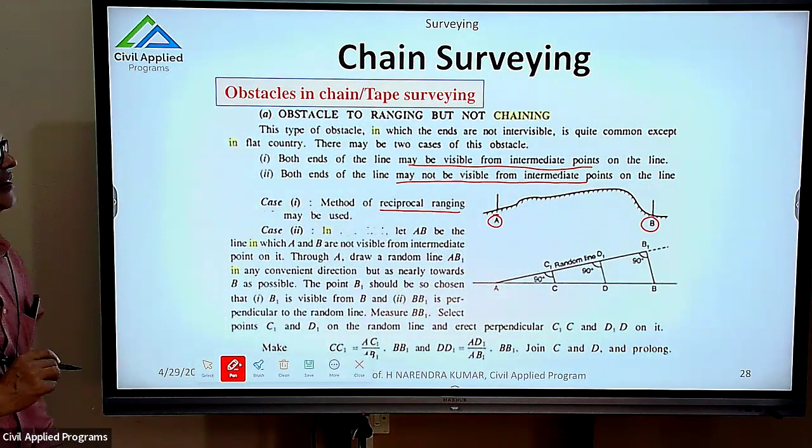In the first case, we know how to solve it - we'll go for what is called reciprocal ranging. If I select intermediate points M and N, A and B are intervisible from M and N. So A and B are not intervisible directly, but from intermediate points they are visible. Then I can easily go for reciprocal ranging, or indirect ranging.

If the points are not visible from intermediate points, then I need to go for what is called the random line method. When both ends of the line may not be visible from intermediate points, because there is a large mound, they are not intervisible - then I need to go for the random line method.

What I'm going to do is, since there is a large mound, I will take a random line away from the chain line, from A to B1. From B1, B is visible, so I'm going to erect a perpendicular here - you can see the perpendicular. Similarly at D1 I will erect a perpendicular, and at C1 I will erect a perpendicular. A simple way of erecting the perpendicular.

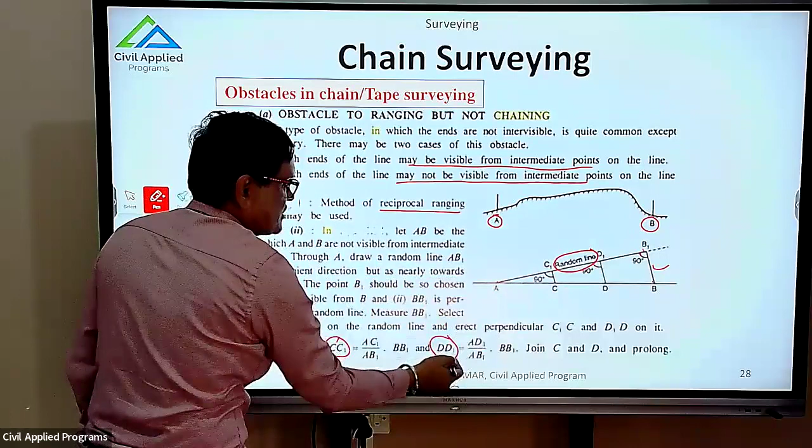Similarly, DD1 can be calculated using AD1 divided by AB1 multiplied by BB1. So here AD1 can be easily measured, AB1 can be easily measured, so I can calculate DD1. Like that, I can erect perpendiculars for any number of points from the random line - CC1, DD1, EE1, FF1 - then I can mark C, D, E, F on the chain line. This is called the random line method.

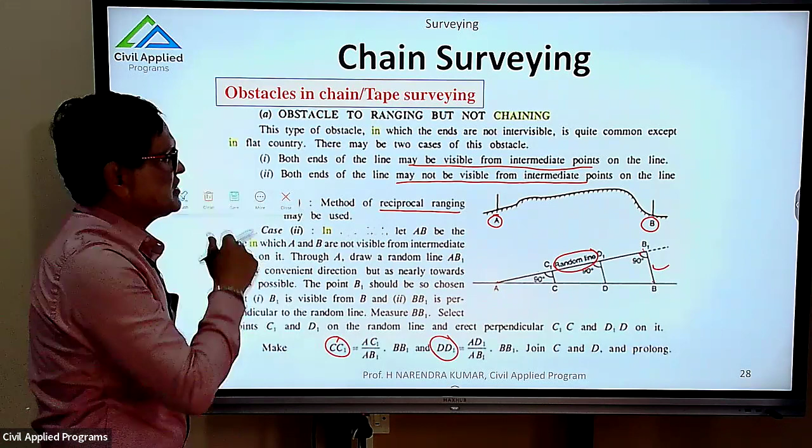This has nothing to do with reciprocal ranging. Once again, let me tell you: reciprocal ranging is used when the stations are visible from intermediate points, whereas the random line method is used when stations are not visible from intermediate points.

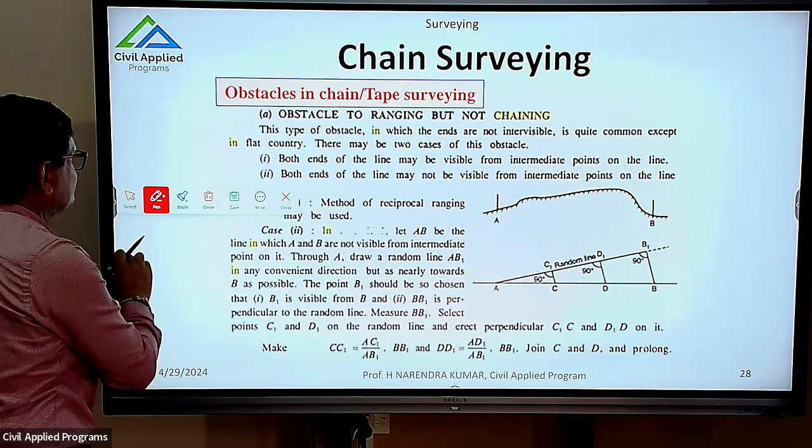Next one is obstacles to chaining, but not ranging. So there are two classes here. Under this, there are two cases.

One is nothing but a simple pond. The second one is a river. So how actually will a surveyor look at these obstacles?

The second one is, it is not possible to chain around the obstacle. If it is a river, like the Kaveri river, it starts in Coorg and ends up in Bay of Bengal. It is infinite almost in our basic survey. So how to overcome those obstacles? It is a different methodology altogether. So one by one I will take up.

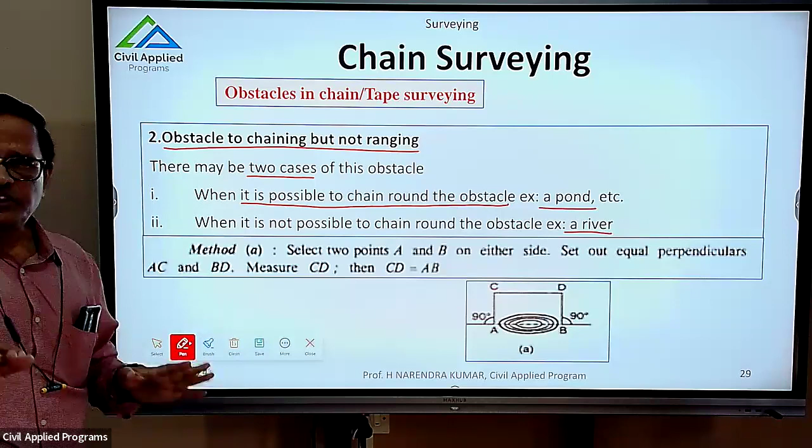Let me explain one or two methods here. The first one is, a pond is an obstacle. Once again, please do remember, both the cases fall under obstacles to chaining but not ranging. Chaining is a problem, but ranging is not at all a problem.

In the first case, okay, I am not going to read this sentence, it's a very simple one. A pond is there. So you can consider two stations, A as well as B, on either side of the pond. What you need to do is erect perpendiculars at A and B, such that AC is equal to BD.

So when you make AC equal to BD, then CD is equal to AB. Simple, because it becomes a rectangle. A simple way of overcoming the obstacle using our simple geometry.

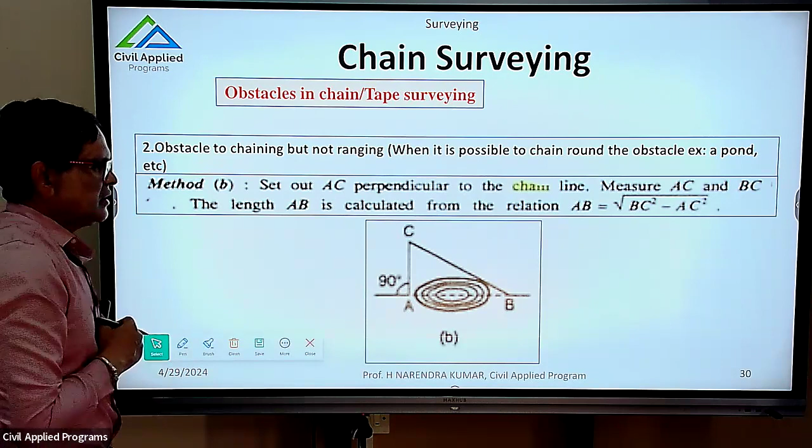Always make sure you use a simple methodology in the field. So next is, once again, the same point. Here, what I'm going to do is, at the near station, erect a perpendicular. Join BC. But this BC line should not actually fall on the pond.

It should be away from the pond. Then you can easily calculate AB using Pythagoras theorem. AB equals root of BC square minus AC square, because BC is the hypotenuse and AC is the opposite side. Simple mathematical equation.

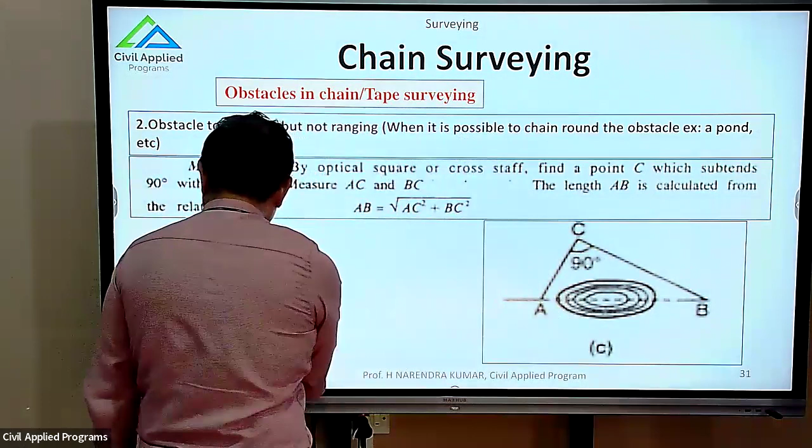Next one. Here, you draw a line, set a line AC, and fix a point C away from the pond. At C point, you can take a perpendicular. First, you take some known measurement and mark C station away from the pond. At C, erect a perpendicular such that it meets the chain line at B.

So this is one of the constructions. Here the advantage is, you can select the C station randomly, so fewer people are required here. You need to have some basic mathematical ability while conducting surveying. Depending on people availability, choose a relevant methodology to overcome the obstacle.

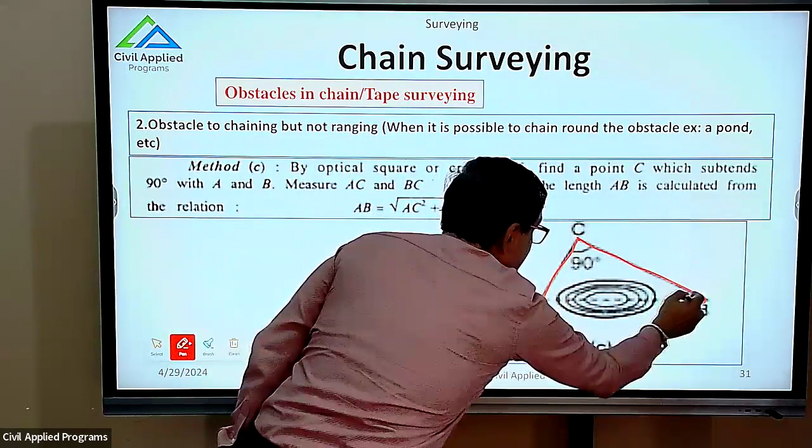So this is a simple obstacle. You can make use of an optical square, stand at C point, a random point, and erect perpendiculars so that those perpendiculars meet at A station and B station on the chain line. Then calculation is not at all a big problem. Use once again the Pythagoras theorem. AB becomes the hypotenuse, root of AC square plus BC square.

Simple. So when you employ this, and the number of people available is very less, say only 2 people, then what are you going to do? You are going to erect a ranging rod here and there, and using a cross staff or an optical square, you can erect a perpendicular, measure AC distance, measure BC distance, and calculate AB distance.